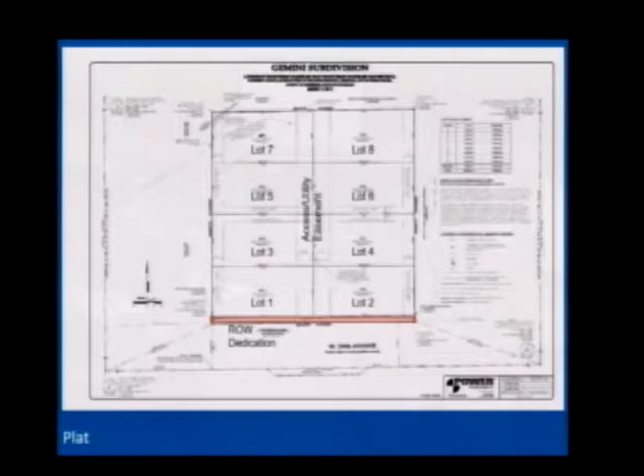Commissioner Sembai: Scott, as commissioners in this particular application, do we care about parking and garages? Do we get to ask those questions in this case? For this particular case, no, it's just for the plat. And that actually all follows under the site plan review, so we wouldn't be able to approve anything that didn't meet the minimum requirements.

Commissioner Antle? No questions, thank you. Commissioner Voss?

Yes, so you did say there was neighborhood notice, and there was no meeting held? There was just... For a subdivision plat, this is the first public hearing. But are people actually in the vicinity notified that this is the public hearing for that particular site? Yes. Only by the sign that's on the property, or through?

No, mailings go out to property owners within 300 feet of the property, and that includes if there's an HOA tract, and the HOA would be notified. All right, thank you. And on page 3—

West 38th Avenue from Lena Gulch, the third paragraph roughly. Could you explain this statement, this paragraph, and how it relates, why it relates? This might be a better question for Mr. Dave Brossman, who's in Public Works. There's an active plan for redevelopment of that intersection, including some street improvements and sidewalks.

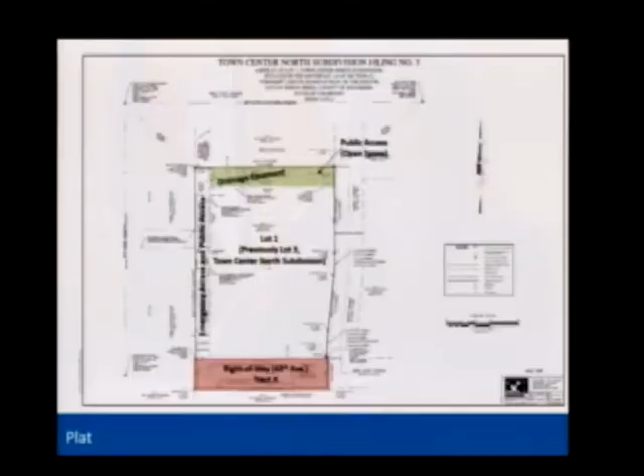Since Wheat Ridge is not a full-service city, we sent the application out on referral to fire, water, and sanitation, as well as reviewed it internally with Public Works and Planning. Planning and Public Works find the plat approvable pending some minor revisions, mostly technical corrections, and there are no outstanding concerns from outside agencies.

Civil documents and site plan are also concurrently under review. There was a 15-day public hearing notice for Planning Commission. We didn't receive any calls or letters, and the site was posted.

Mailings were sent out to property owners within a 300 foot radius. So with that, staff finds that the plat complies with the standards in Article 4 of our subdivision regulations of City Code. All agencies can serve the property, and the plat will facilitate development of the site in compliance with the approved concept plan.

Therefore, staff is recommending approval of the subdivision, case number WS 1903, with conditions to address the technical comments outstanding between planning and public works, as well as having the developer enter a subdivision improvement agreement prior to recordation of this subdivision plat. That's to get the public improvements in place for the perimeter and internal construction. That concludes my presentation, but I'm glad to answer any questions.

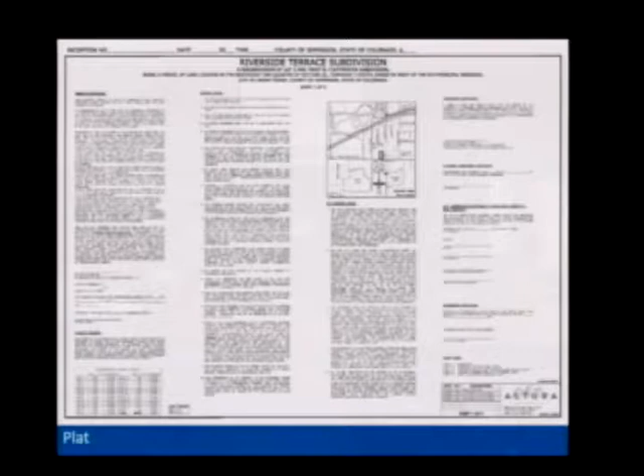This is the cover sheet of the plat, with lots of information on there, including legal description, signature block, and a lot table, which shows the lot sizes and tract sizes in the southwest, bottom left corner. This is the plat map, but I'll show a zoomed in version to give you a better idea of what's going on in the site. I've added some color to this image to show the different areas of the site.

You can see the 3 townhome buildings, which are outlined in orange. There are 6 lots per building. Then we have some open space and landscaping, which are all in the HOA tracts, on the west, kind of between the buildings, on the east side and north side. This is not a super accurate diagram, but it gets you a good idea of where the larger portions of open space are. There's also a drainage basin located at the north of the site in tract D.

And like I said earlier, all the townhome units are alley loaded. So the process for this project, we did refer it to all outside agencies, including Fire, Water District, Sanitation, and Xcel. We did not receive any concerns from the outside agencies.

We also did an internal review. Public Works and Planning have both found this plat to be approvable. It meets all our city standards, including the R3 development standards. Civil documents and site plan are currently under review by Public Works and Planning, and those comments are being wrapped up shortly.

There was also a 15-day public hearing noticing for this hearing. We did not receive any contact from the public, either phone calls or letters received. That was, again, a 300-foot radius, as is required for all subdivisions.

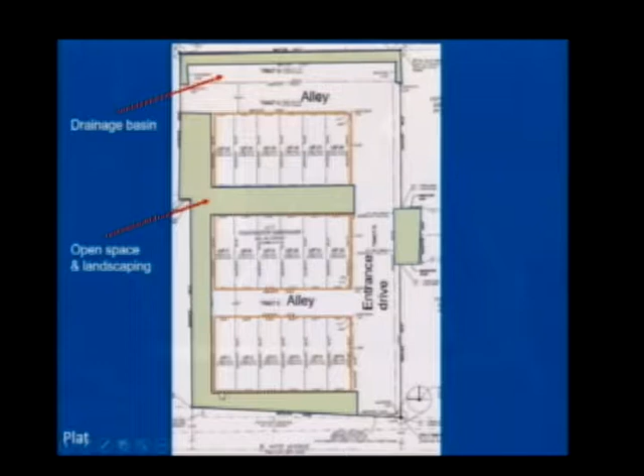If you look at the screen, this entire northern half of the site, the only paved portion would be this section of alley. Everything else would be an open space connection to allow for more continuous open space. So even though this is all in green, there's pedestrian pathways and paseos and landscaping in these areas that would potentially connect to this site, but they also connect around to the front of these buildings, so it's a usable amenity. So why is this not considered parkland then?

So for the purposes of parkland dedication, that would become a public park that's owned and maintained by the city, and often our Parks Department doesn't want to take on irregularly sized or embedded developments of this scale. It's just a very small amenity to maintain. And they would rather see something like with Stephanie's presentation, where it's a larger developable public amenity that's significantly larger than this entire site, as opposed to something that's really small and embedded in a private development.

So there are examples where the Parks Department has developed new parks recently, but in the cases of these developments, it makes a lot more sense just from a maintenance perspective to have it be a privately maintained amenity versus dedicated to the city, which would require a subdivision and usually an act of council to approve a public park.

All right, last question. Where do the fees in lieu of park fees go? Those, I actually don't know. I will let someone else respond to that. So those are controlled by our Parks Department, and they basically go into a fund that would then support a public park in the future that they would be able to maintain.

So as we get enough developments come in that require enough parkland dedication, we get the city parks that we're looking for. Sitting here on this dais, I have not seen a lot of that happen lately. On most developments, they've all been fees paid in lieu of park.

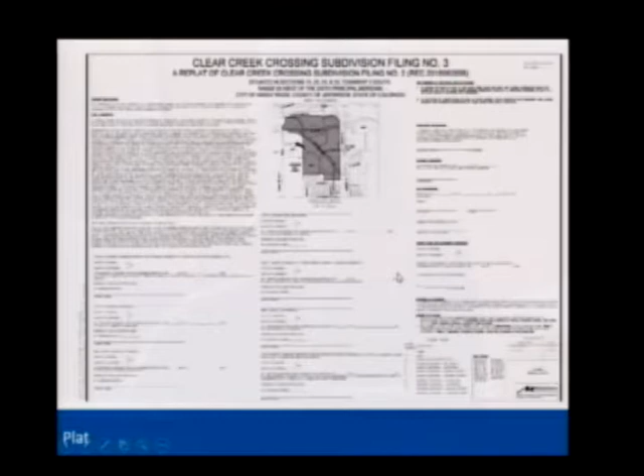The plat itself is a 12-page document. The first 3 pages are the legal description, signature blocks, data tables, and declarations and notes. Pages 4 through 7 go through the current easements, right-of-way, tracts, and lots being vacated or removed. The last pages, 8 through 11, show the easements, right-of-way, and lot lines being dedicated or established by this plat. It's a little confusing looking at the plat. We did ask them to reformat it as a replat, specifically to wipe the slate clean, take away the lot lines, and rededicate them so everything was clean for subsequent development plans, so we can follow the boundary lines appropriately. Page 12 is an overall view of the proposed conditions. For presentation purposes, I'm just going to go through some of the proposed conditions sheets, but you have a full plat in your packet, in your staff report.

So this is just sheet 2, which is the standard notes sheet. It calls attention to the notes that did change, and I'll go through those with you in more detail.

Primarily, the Denver Water note that you see is new. It was requested by Denver Water to bring attention to the easement limitations in the easement agreements. The language is all pulled from those agreements to notify anyone reading the plat of the limitations of said easement. This is in response to the adjustments to the Denver Water utilities and easements that triggered the reconfiguration of the right-of-way and are the primary reason for this replat.

Cross-access note number 18 — staff did ask for further clarification on that note to ensure we get both pedestrian and vehicular access internally between certain lots, and I'll show you when we get deeper into the actual lot configuration. That's to confirm it conforms with the designated internal roadway in the outline development plan or zoning document.

It's also important to note that there's currently a planned cul-de-sac that will end at a certain portion. Eventually, once the northern lots develop, Clear Creek Crossing Drive will be required to go all the way through, but in the interim there's a cul-de-sac which needs that internal roadway network to circulate traffic. Notes 16 and 17 are the secondary trail notes.

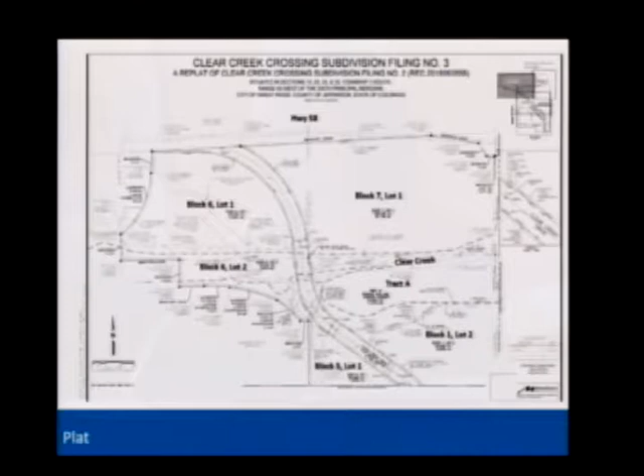So going through each of the proposed sheets quickly, the first sheet on the northwest portion — there are no changes. I've just highlighted the lots and blocks so you can see those in place.

On the northeast portion, you start to see Block 1, Lot 1. That shows the storm sewer easement, part of the new access easement, as well as Block 1, Lot 1 itself. Also, Block 1, Lot 1 would be where the secondary trail would be required in the future along the eastern edge.

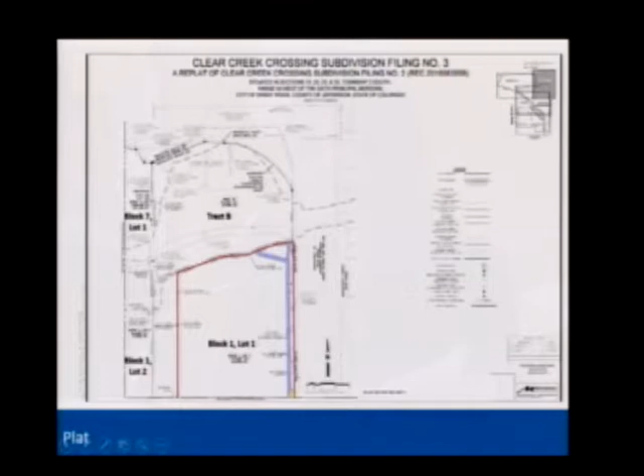The central portion of the development is really where you're looking at the majority of the changes. Here's where you see the storm sewer easement, the access easement, the right-of-way, as well as the Denver Water easement and an Applewood Sanitation District easement.

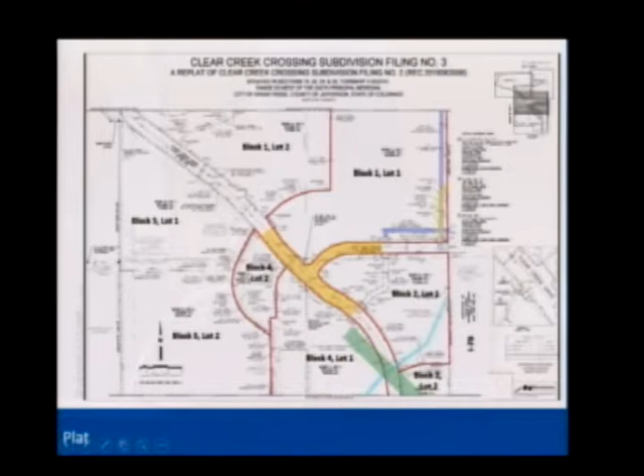To give you an idea of how much these lots are changing: Block 1, Lot 1 is increasing, on your eastern side northeast, by about 0.31 acres. Block 2, Lot 1, just south of 40th Avenue, is decreasing 0.41 acres. Block 4, Lot 2, northwest in red, is increasing 0.03 acres, and Block 4, Lot 1, on the furthest south of your screen, is increasing 0.09 acres. So pretty slight, but just to adjust to that modification of right-of-way.

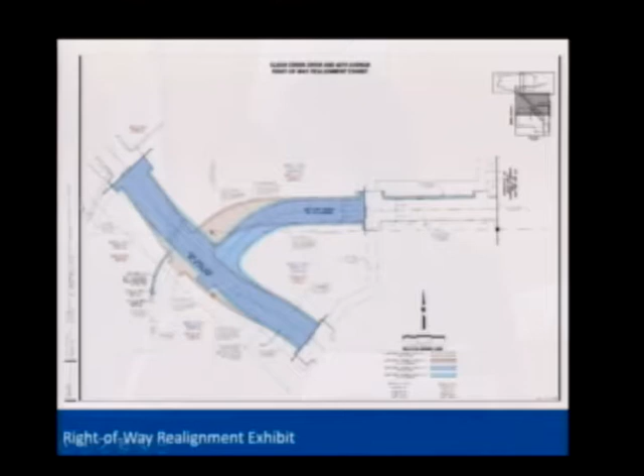This is really the slide that's going to help you understand what that shift of right-of-way looks like. The right-of-way changes are shown: the newly proposed right-of-way is shown in blue and purple, and what was previously dedicated is shown in red. So that's just to show it's moving out of that easement — the Denver Water easement lies on the west side of that, so it's just getting it a little bit out of the way of that easement.

And then the southernmost portion just shows Block 4, Lot 1 being impacted, the Denver Water easement, and the easement that's being vacated.

So in terms of process, we went through the full process with these guys. We've addressed the concerns with outside agencies. Public Works and Planning have found the plat to be approvable pending the conditions of minor revisions. We sent the application out for public noticing and postings, the 15-day public hearing noticing period to properties within 300 feet, and ultimately, staff finds that the plat complies with the standards of Article 4 of the City Code. All agencies can serve the property, and the plat will facilitate development of the outlined development plan.

Staff recommends approval of the major subdivision case number 1903 with conditions. I have added one condition here, and I have a new motion sheet for you to read off of. The first is what you saw in your staff report, to revise as requested by the Public Works Department related to cross-access and a future regional transportation district bus transfer station, to be addressed prior to City Council hearing. We've also added a condition that an updated title commitment be provided prior to plat recordation, which is pretty standard, but we want to see these easements show up in an official document. So prior to answering any questions, I'll give you guys a new motion sheet.

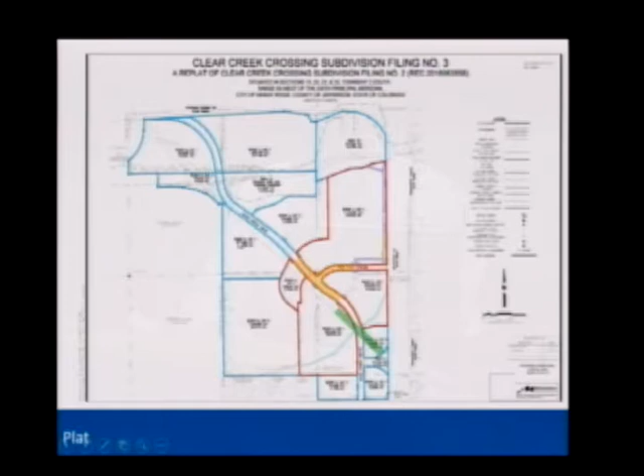The reason we're changing it would actually be done by separate document. Denver Water made some adjustments in their pipe sizes and things that would impact the roadway being above it in certain locations, so that's why they asked that we shift the right of way and add notes showing how large it is.

The depth of their pipe is what's generating the width change in that particular easement, because the depth of their pipe is so far below the proposed roadway that they needed extra room in case they need to maintain it. Is that pipe already installed? I believe that section is, yes. Okay, so that's some of the work you're seeing happening right now.

Okay, thank you. Any other questions for staff?

Is SCL Health planning to develop a medical facility here, or are they just a development investor? That's currently the plan, so we haven't approved any plans on that. It would be Block 1, Lot 1. The zoning does allow for a hospital, and that was the intention when they purchased it.

So they would just develop it. They're not necessarily developing a hospital at Block 1, Lot 1? That is the intention, yes, that it would be a hospital. Oh, it would be a hospital?

Kind of close to the highway for a hospital. We'll let them choose their sites. Okay, thank you. Any other questions?